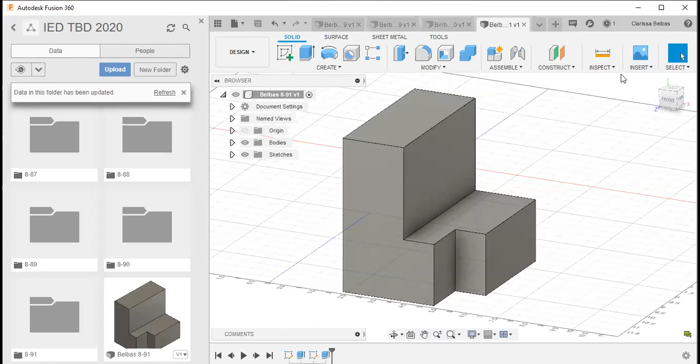Okay, so I'm gonna create a new design. Oh, are you recording? Yes, ma'am. Okay, all right, so create a new design.

Create a sketch on this surface right there. Okay, so let me think about this. Which would be the best way to do it? I'm going to do it a different way than I have been doing it, just to show you an alternative method.

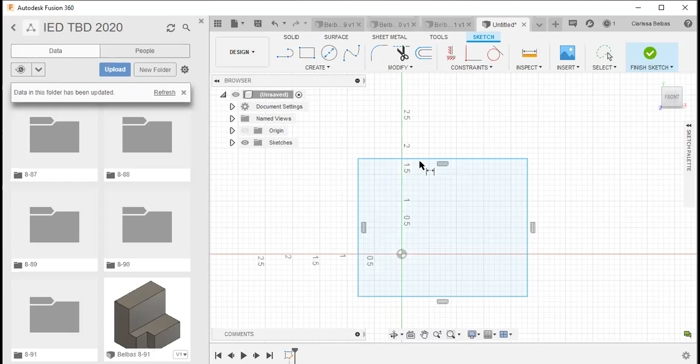So I'm going to start this one with the square with the circle. So there's my square. Let's dimension it here. This would be 2 inches.

And what is that one? Wow, did they not give that dimension? Oh, it looks like it's 1 inch to the, wow, okay. So what is this one? It's 1 inch to the center of the circle.

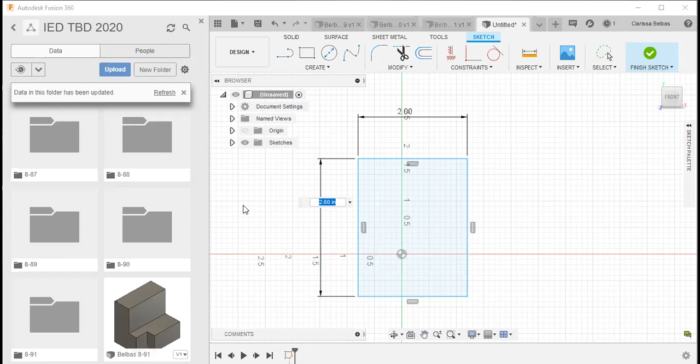Huh, they don't give that dimension, but let's guess what the circle is. 1.5. Maybe it's 2.5, let's try that. It's kind of hard to tell because there's missing data. I guess it's 2.5.

All right, let's go ahead and extrude this. Oh, I'm going to put my circle in there first. Sorry, I'll go back to the front, hit escape. Escape again, let's go ahead and put the circle in there.

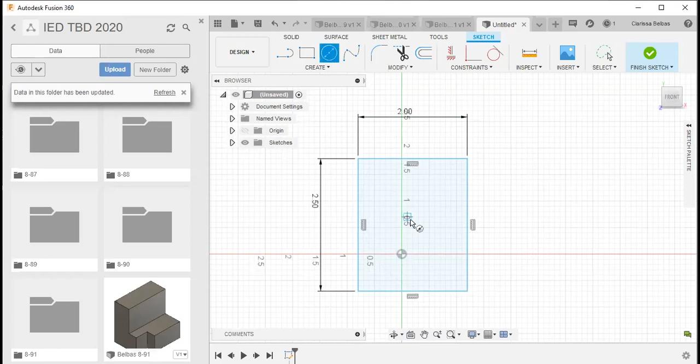All right, so dimension it. This circle is supposed to be 1.5. Yeah, that looks close. And let's see, it's supposed to be 1 inch from the center to there.

Huh, it popped there automatically for me. And it's 1 inch from the top. From the center to the top is 1 inch. Now this is a big no-no right there.

I don't want that dimension line going through that dimension line. So let's just slide this one. How about if we take it down here? That's a lot nicer. Okay, so I think that's all the dimensions on that.

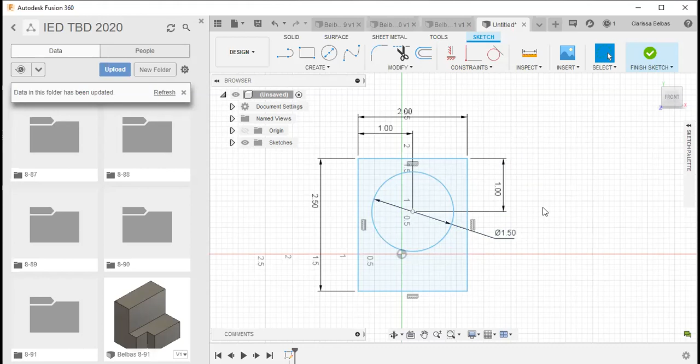Escape again, so let's extrude this. Select that surface, rotate, hit escape. Coming up to solid, extrude. And let's see, how far out do I extrude it? It goes 0.45. Okay, so there's that surface.

Now what I need to do is draw the piece that comes out here. And I'm going to draw it in a weird way because I want to show a time when you might extrude in both directions. So what I'm going to do is create on this surface right here, and I'm going to pop to this corner and draw the rectangle coming all the way over to there.

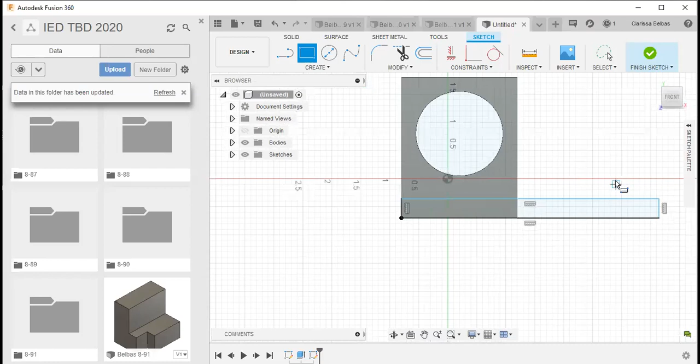And it looks like it is dimension-wise supposed to be about 3.55. And it looks like this way is maybe 0.25.

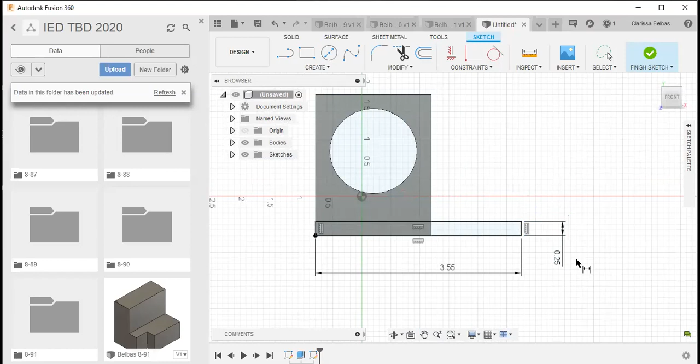Never leave it like that, it's really hard to read. So drag it out to here. I think that's all the dimensions I need.

Now let me rotate it sideways so you can see where we are. So you can see this sketch was on the surface. Now if you look at what I need to create in my part there, you can see that I need to extrude out this. And I'm going to have to hit the shift key because notice it only selected that one for me.

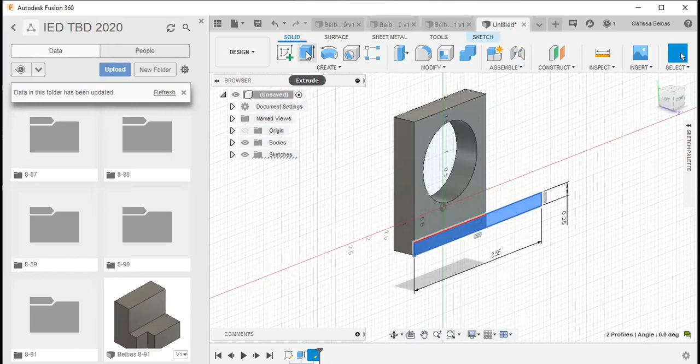So I'm going to have to select both, shift to get both of those. But look what will happen here. Well, let's just go ahead and extrude it and you'll see. So I'm going to extrude it out this way.

Just drag it out a ways here. Hit OK. So this is not completely correct, because what do you notice back here? And if you look at the part in the book, you can see I'm actually supposed to have something back there. It looks like I'm supposed to have this piece extrude all the way back there.

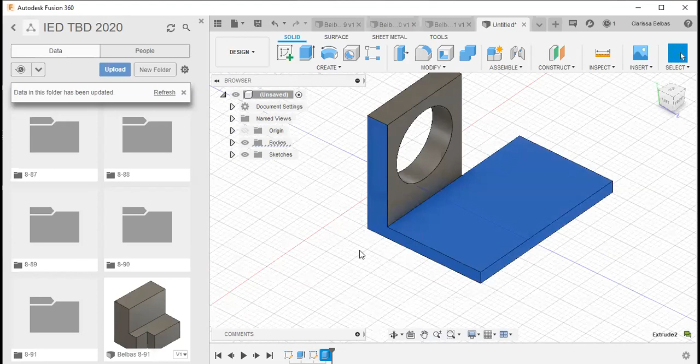So this is a time when extrude in two directions is really handy. I could have done it another way, but extrude in two directions helps. So I'm going to come pick my extrusion, right mouse click, edit feature, and this time I'm going to extrude two directions. I'm going to rotate a little bit so I can see what I'm doing back here.

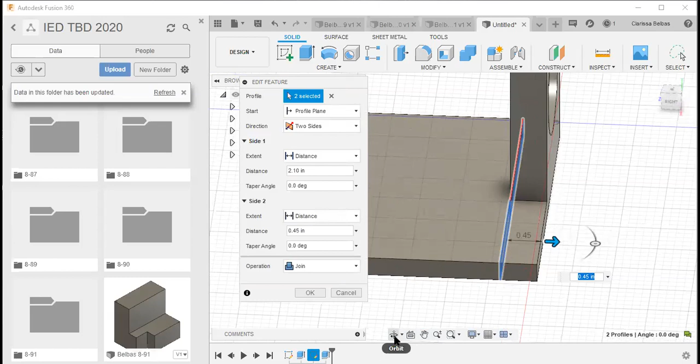And now I can extrude this back, zoom in a little bit so I can see. And there, I've extruded all the way to there. And that was 0.45 inches.

Now this total distance across here is supposed to be 2.25. So you can see this probably wasn't the best way because the math isn't the greatest. So this will be 2.25 minus 0.45. So how much do I have to the front? And that's 1.8.

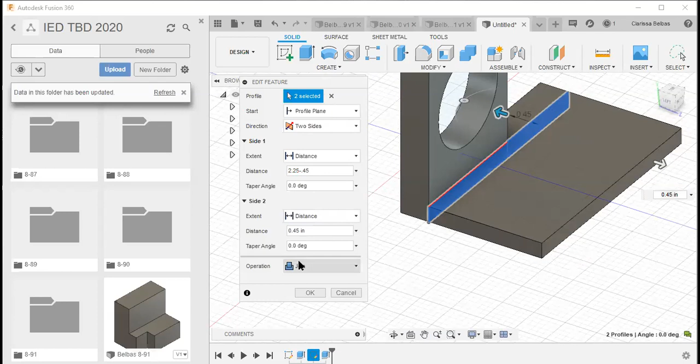Okay, so that should be correct. Now let's check it and see if my dimensions are correct. This was something I didn't show in the other videos yet. This is the inspect tool. So I can come up here to the inspect tool and measure.

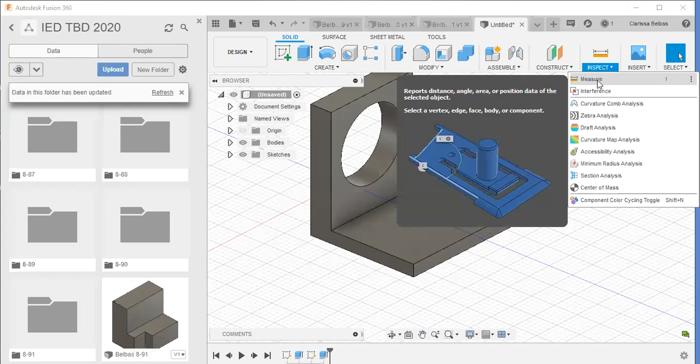So if I click on this line right here, it tells me that line is 3.55 long, which is exactly what I'm supposed to have. So that's good. Let's hit restart and check this dimension back here. And it's 2.25, which means I did my math correctly because that's what it says it should be in the book.

What about across the top here? 2 inches. Restart, and let's check the circle. Circles are a little bit weird, it gives you the radius and the diameter, and you'll see the diameter is 1.5. So generally speaking, it looks like I have this correct.

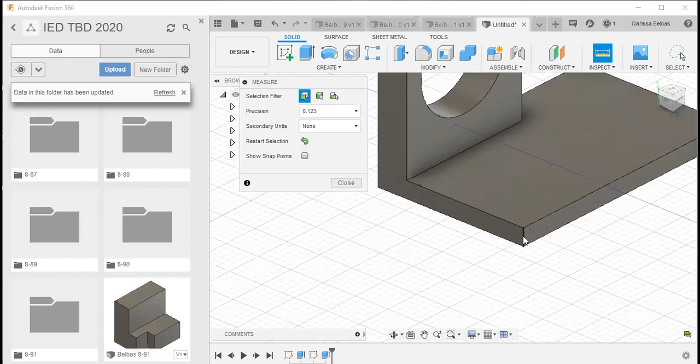Let's check one more key dimension here. Did I get the thickness correct? 0.25, yep. So that's a way to go through and check all of your stuff.

So I think this part is done. That was a little different way to do it, to show you a couple of different ones. Usually I would start by drawing this and extruding it backwards, and then cutting out the circle and cutting off this piece. Maybe I could do it that way also. Let me save this.